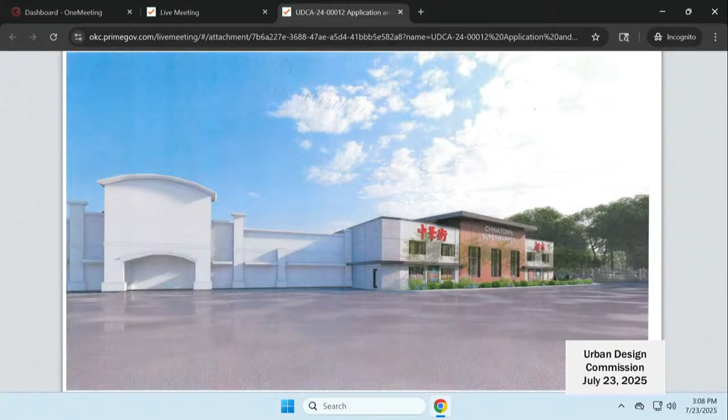Okay. Applicant? Hello, everyone. It's Holly Hunt, Sam Gresham Architects at 400 Northwest 23rd Street. I see some faces that were here last time we talked about this project and some that aren't, so I'm just going to give a quick recap.

The orientation of this building, while unique, is very much in keeping with many of the design guidelines in the urban design overlay district, including urban density and putting parking lots behind buildings as a way to create a very beautiful streetscape.

Since you saw this last, we have really tried to make this a more comfortable, inviting pedestrian space, including much landscaping. We've got benches. We've included some murals on the building, including some windows on that lower level.

We've also lowered the awning, something I discussed with staff regarding the rhythm of the fenestration. Lowering that canopy, as you can see, it aligns with the building next door, and it is a common break point for a lot of the fenestration along this street.

We've also lowered the window sills of the larger windows that you see facing Classen. This again just helps to create that connection with the street for pedestrians and passersby.

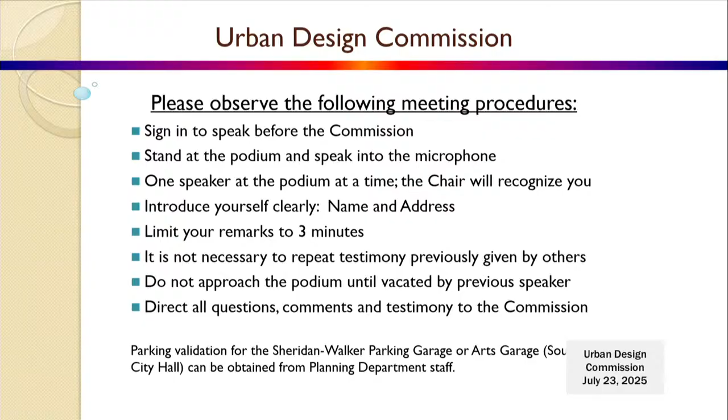Again, if it gets wet, it'll get a little darker and then it'll dry. That's what you're seeing here because I tried to wait for a dry day in June, but it was very hard because we had so much rain. So that little bit of variation does exist.

Again, if paint's the cure, I think our owners are more than amenable to that. I don't want to play architect on your project, but I'm concerned about the consistency and the look and feel of what you're going to get with just that raw concrete. There's an image showing an example of proposed tilt-up concrete modern design, and that looks pretty cool, but I've never seen that, not even in precast done in a shop. So I'm a little concerned about that raw concrete just sitting there.

As far as the staff's concerns about signage, I just need to get him more dimensions and drawings on these and run those calculations again for that quick turnaround. But I am happy with a condition to submit all of that to staff. Mike's probably sick of me by now, but I'd be happy to get all that to him.

I have a question. The concrete isn't really bothering me so much, but I am questioning a design aesthetic that does not provide a door from Classen, and that entry is baffling my mind. Help me understand that.

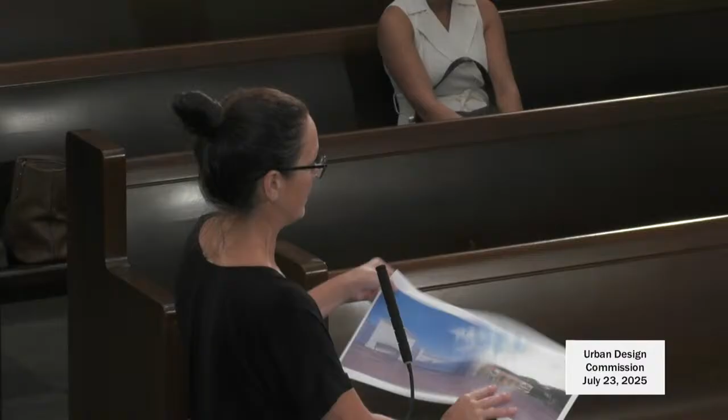And while we do have a door, there is an exit door - you can see it in this rendering. There's an exit door there, and there's also a door on the south side. So there are doors, but in this location it just doesn't really work for the interior layout, nor would it work for the users of the building.

Again, I have shown an option with a door on that side, and the owner really feels it's going to be an issue for him in the future running this business. So we're pushing for no door on that side, since it will never be used and likely will serve no function other than to create a dangerous security issue.

I do understand it from a utility and function standpoint, and I've been a business owner and developer myself, so I get both sides of that. From a design aesthetic, it's yuck. But I do understand you've got to run a business.

That's why I dressed up that side to look and feel like the front facade. It doesn't feel like the back of a building to me - at least that's not what the majority of grocery stores look like on the back. So we've done a great deal to try to avoid having a secondary or backside to this building, and that was our design solution to that.

And there's not currently a door on the west side, right? I think it's Golden Phoenix, maybe. Yes, there's no entrance to the grocery store on that west side currently.

And currently, in this rendering, you can see this is the entry for the Golden Phoenix restaurant here. There's a little bit of parking there - it's non-compliant parking that's existing that we're very gracious to have been able to keep. But that's the only, there may be 8 or 10 parking spaces on that side, and they're mostly used for to-go orders and things like that.

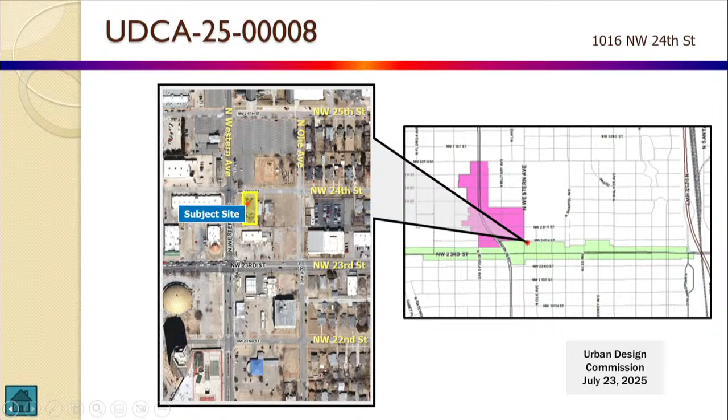Any questions for staff? Do we have an applicant available? We do. Mark Zitzow, Johnson and Associates. I think Michael pretty well covered it, but I'm happy to answer any questions.

I don't have any questions, but my comment I'll make, the house is beautiful. I'm just kidding. No, architectural gem. I support, I appreciate the pictures. I believe this is a substantial improvement, and I think it's fitting to what I believe people in the district probably would support.

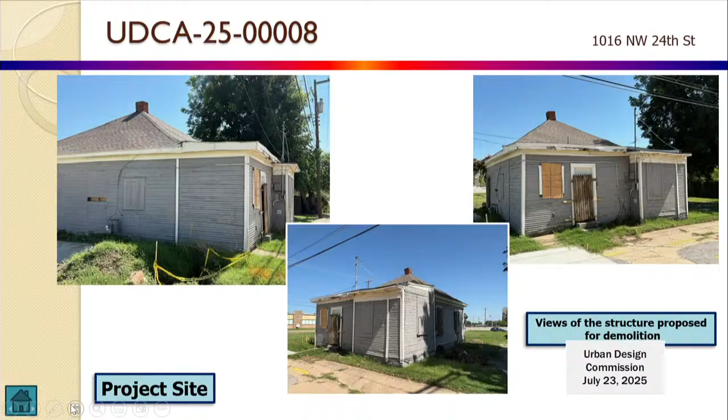I'd make a motion, but I don't think I'm allowed to. Are there any other questions? Because if not, I'll put a motion out there. Any other questions? I think we're ready for a motion.

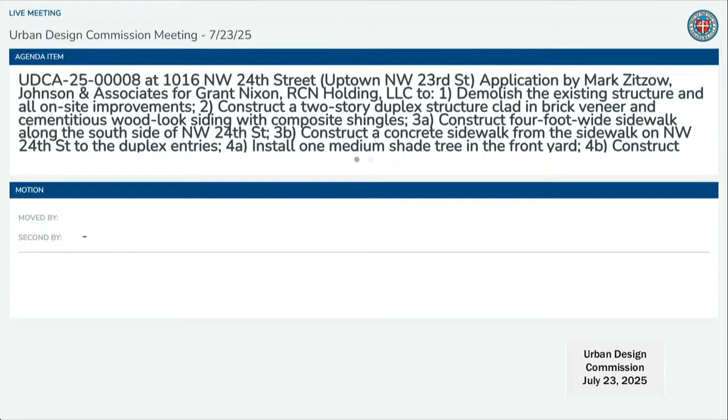Motion to approve the application on the basis that the project meets the regulations and guidelines of the Urban Design Overlay District zoning ordinance as referenced in section C and D of the staff report. Have a second? I'll second.

Right? It's passed? I meant to vote yes.

All right, moving to the next item, we have UDCA-25-00013 at 904 Northwest 23rd Street.

Again, this is one where we took a look at the existing structure on site, made some assessments with respect to the applicable criteria for demolition in the Urban Design Overlay District. Very much like the last application, there are a series of structural deficiencies with this particular structure.

The application or submittal packet includes a copy of the engineering report prepared for this. Part of it shows a lot of trash, debris, and rubble that can easily be removed, but there are also interior structural issues impacting the building, visible in some of the other photographs in the agenda packet.

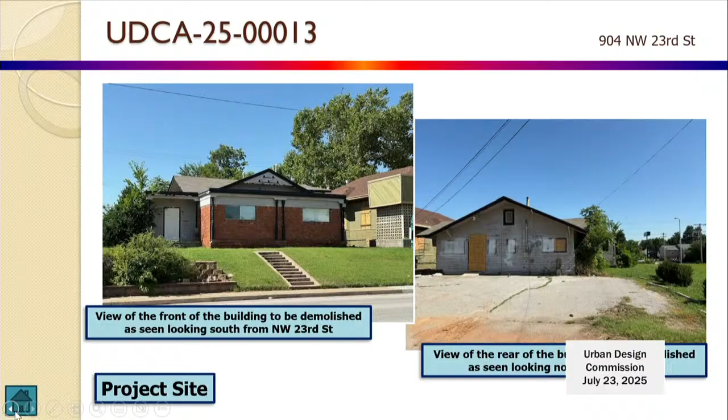Got it. Yeah, I was getting ahead there because I saw the images, and then the intent I know is demolition. So I bring that up - it's not a comment, maybe. As it goes down, you just know parking is always a thing that either neighbors or even commission has.

So is there any other questions for the applicant? Is there anyone in the audience that needs to come to the podium?

Okay. I'll make a motion to approve the application on the basis the project meets the regulations and guidelines of the Urban Design Overlay District zoning ordinance as referenced in section C and D of the staff report. I'll second.

All right, it's passed. Thank you. All right, next item here, we have...

UDCA-25-00014 at 908 Northwest 23rd Street.

This application is part and parcel of the one you just heard. It's right next door to the last project at 908 Northwest 23rd Street on the south side of 23rd, just west of Francis. It's basically the same, essentially the same review process, essentially the same type of structure we're dealing with. It was originally built as a single-family structure in 1918. It's been substantially modified at the front of the building.

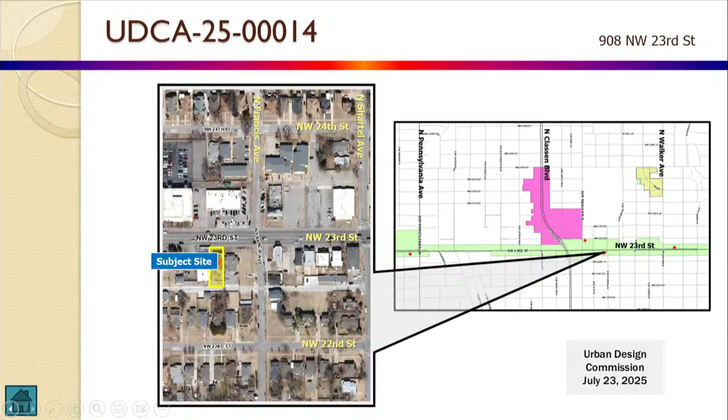When it was converted to commercial use, probably sometime in the 50s or 60s. The engineering report you saw on the last project is the same as for this one, and the pictures in that report document some of the structural deficiencies impacting that particular structure. Again, because of the modifications made to the structure, we feel it's not a significant architectural or historical resource, and therefore we've recommended approval of the demolition of this structure to the commission, and we're prepared to respond to any questions.

Okay. Mark, I assume you're the applicant? Yes. Mark Zitzow, Johnson Associates, 20 Sheridan Avenue. Nothing to add, just happy to answer any questions.

Okay, I assume there's no one else in the crowd. Do we have any questions for staff or the applicant? No, but I have a comment that I think that breeze block is really pretty, and maybe when we're demoing some of these projects, if you want to someday swing by, I'm sure we can put it to good use somewhere. Make a great patio. We actually used that and had to source it for the class. Yeah.

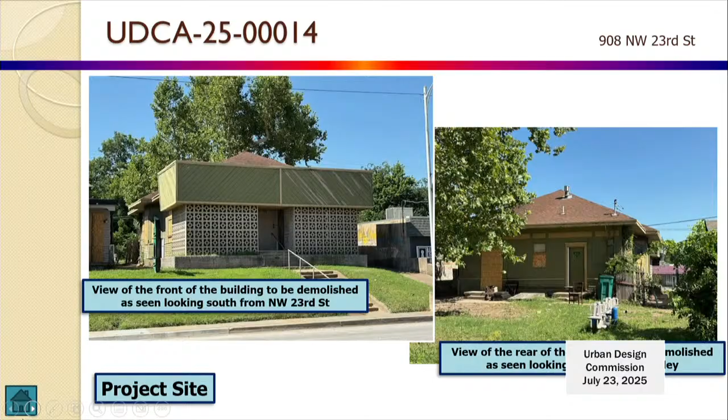All right, do we have a motion? I'd like to make a motion to approve the application on the basis that the project meets the regulations and guidelines of the Urban Design Overlay District zoning ordinance, as referenced in section C and D of the staff report. Okay. All right, it has been approved.

On to the next item, UDCA-25-00015 at 417 Northwest 23rd Street.

Thank you, Mr. Chairman. This application is for a commercial renovation of an existing structure on the north side of Northwest 23rd Street at 417 Northwest 23rd, located between North Hudson and North Walker. It's just two doors down from the Tower Theater to get your bearings on where this project is. This building is owned by the OKC Community Church, which also happens to own the building and the property next door to this on the west between this site and the Tower Theater.

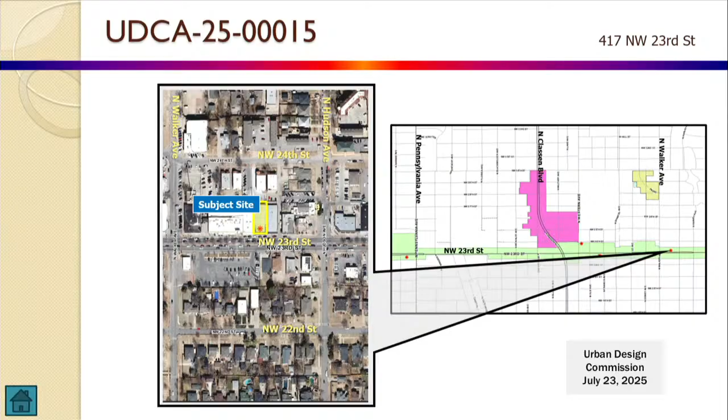They're proposing to expand their church operations and functions into this building next door, and as part of that, they've proposed to renovate the front facade facing Northwest 23rd Street, most notably the removal of this massive wooden canopy that was probably built in the 50s, based on our research. Additionally, there's a glass storefront on this building with two angled entry doors, one at each end of the facade, and those entry doors abut some stone veneer facades on both ends. Initially, when we got this application, staff was pretty concerned about that modification, because that was kind of a historic theme of the day in building commercial buildings at that time.

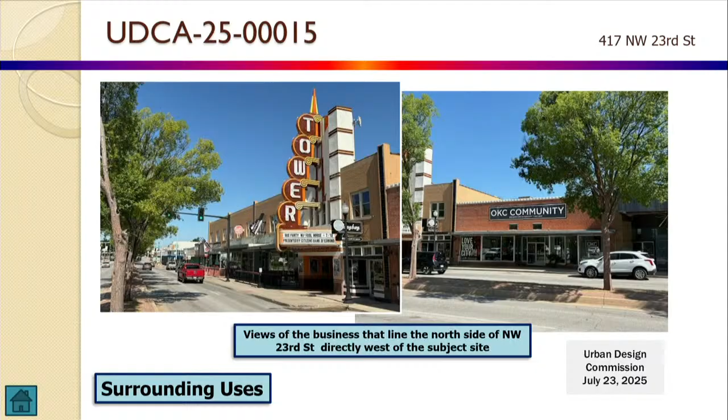However, after reviewing it against the design guidelines and the other applicable provisions of the Building Conservation and Rehabilitation Guidelines, we came to the conclusion that because they are proposing to make this building look a lot more like the building it sits next to—I don't have those images, can you show those, Katie—we feel that it's appropriate to allow this renovation to proceed as it's been designed and presented to you, and therefore we are prepared to recommend approval of this application, and we are available for any questions the commission may have.

I have a question. Why do you want to get rid of that unique canopy structure? Hi there, my name is Collin Fleck, I'm with Bockus Payne Architects. Why do we want to get rid of it? Maybe a little bit subjective.

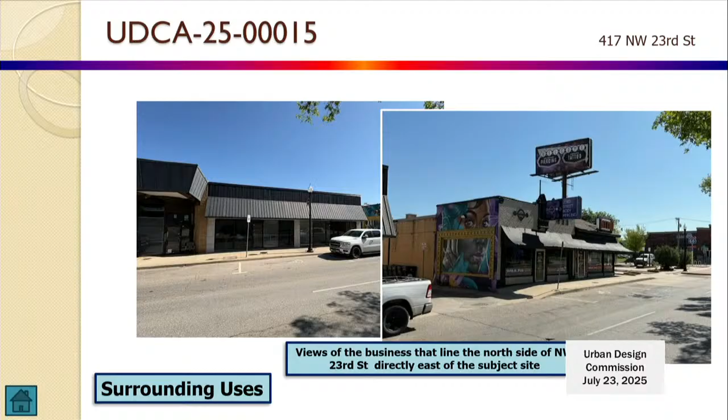There was a desire by the church to relate more to their existing structure, making it more visible for their entire operation there. So when we began discussing what they were looking for, we immediately started thinking about how to fit the context of what's there, and whether it was possible to reuse that. We pretty quickly determined it was not desirable to keep it and didn't align with their vision for this property. From a scale perspective, they're looking to transform the storefront section into more of a coffee shop.

They wanted to bring the scale down, bring canopies that are a little bit lower. Eventually they'd like to have some streetscape furniture, encourage pedestrian access, and be a little more inviting. It felt counter to what's there. That's a subjective thing, but that's the thinking behind it.

My opinion is that it's actually a unique feature of 23rd Street. When you get into developing long swaths of shopping centers, of which I have done, and start to make it all look so similar, which I have done, it does take away. For me, when I drive down 23rd Street, that canopy always pulls my eye right to it. Maybe it needs reconstruction, maybe it can't exist, but it's just my opinion that it's a beautiful aspect of that street.

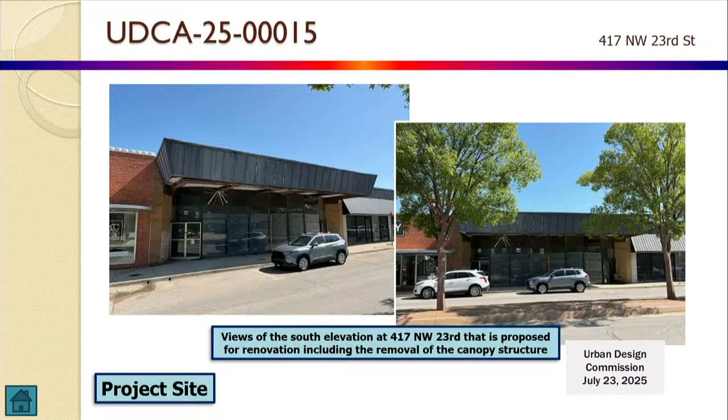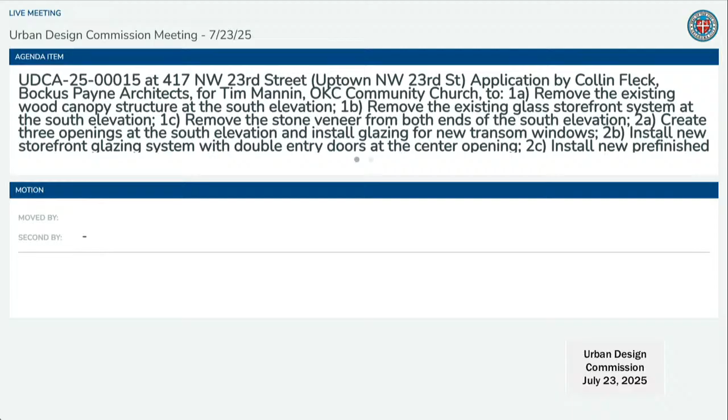Yeah, I don't have any other comments. If there's no other questions, we'll want to make a motion. I'll put forward a motion to approve the application on the basis that the project meets the regulations and guidelines of the Urban Design Overlay District zoning ordinance, as referenced in sections C and D of the staff report. I'll second. All right, it's been approved. Thank you.

Okay, next item, we have SPUD-1737 at 2944 Southwest 8th Street. Good afternoon, Laura Griggs, Planning Department.

None of you have seen this before. The last time this property was rezoned, we still had the Riverfront Design Committee in place, and so it went before them. At that time, it was rezoned to a glamping facility, which was the first time I'd ever heard that terminology. Unfortunately, that project never was realized.

So we have a new SPUD that has been submitted, and it is before you to make a recommendation to the Planning Commission, actually at their meeting tomorrow afternoon. So this originally was on your agenda for June, and normally we don't cut it that close, but we

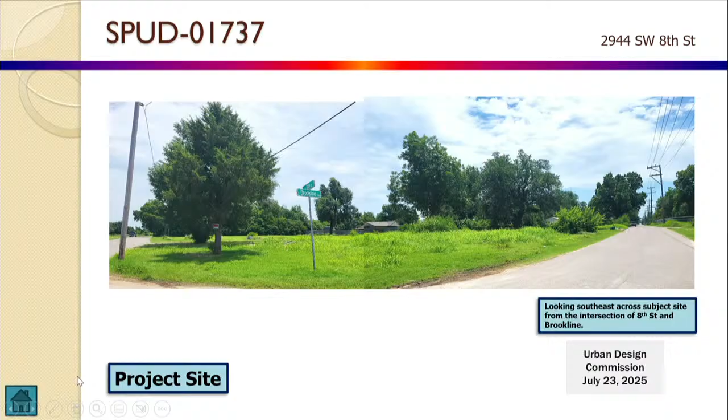unfortunately had to delay it because we didn't have quorum. So this particular area, if you're not familiar with it, this property is vacant right now. It definitely needed mowing while I was out there. It is directly across the street from the trail, directly across the street from the river, and there is an access on the corner across the street.

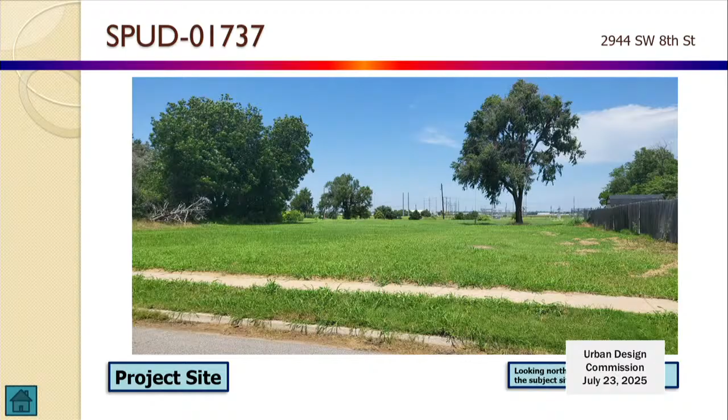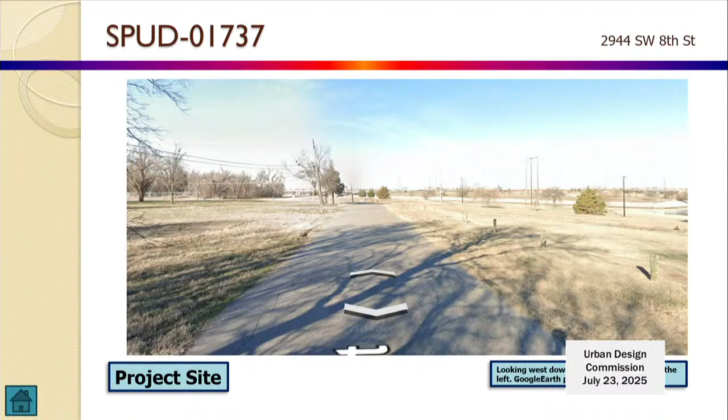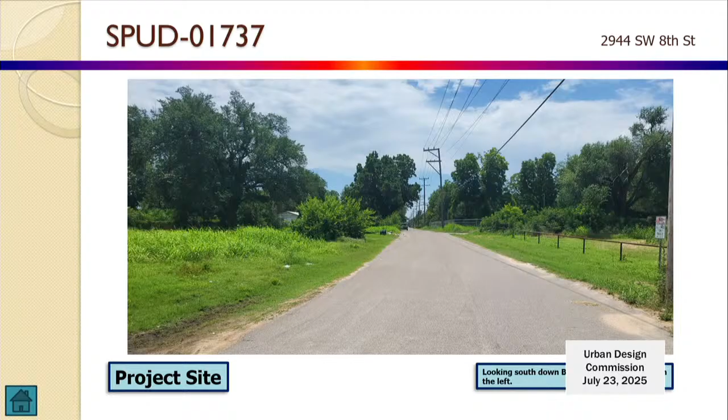So anything that goes here has really easy access to get to the trail and go east and west. It is adjacent to, so we have, this is where you can see all the trail and stuff. It is in a residential neighborhood. Obviously, we don't have curb and gutters, we don't have sidewalks out there, so it is more rural feel when you get out there. And as you're looking at all these pictures, you're not actually seeing any other houses, but we do have some in the area.

Immediately across the street to the south, we have residential, and then this surrounds a residential property. If I'm not mistaken, it was on council recently for being declared dilapidated. And there is another residential structure that's on the east side of it.

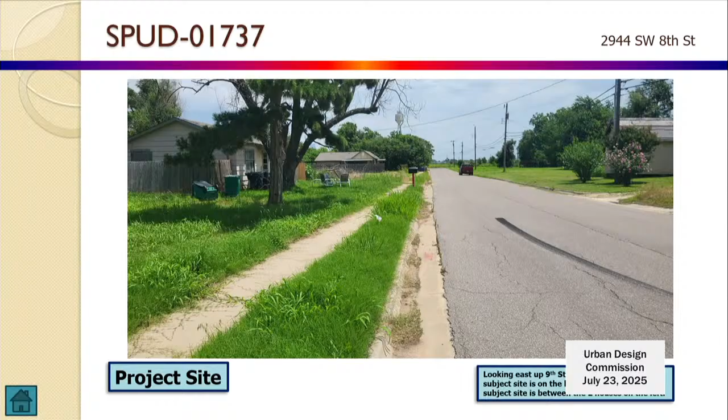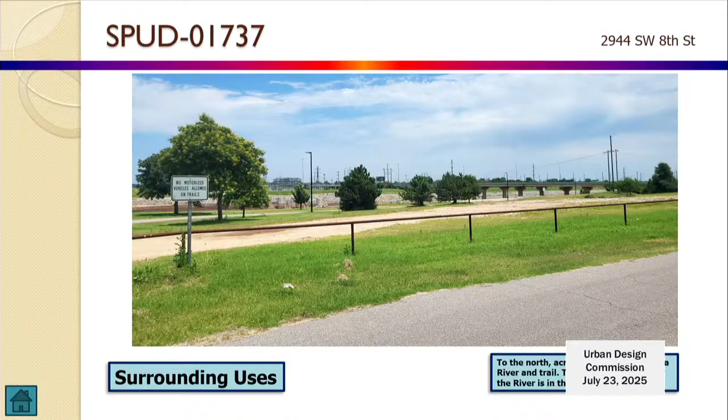So we have an area that could definitely benefit from the improvements that would be made because we will require sidewalks, and we will end up with some density on this site. And obviously the city was working on something too, but this is the gate that's in the corner. So there's easy access for people because there's an opening. You can get there on your bike or you can walk through it to get to the trail.

So this is the house that's being declared dilapidated, and this is one that was recently renovated that's adjacent on the east that is occupied because there were cars in the driveway, and then this is the one across the street to the south. So we'll just kind of land on this one right here.

So this particular piece of property is now being proposed for a SPUD that actually has some more uses proposed. Staff really didn't have any issue with any of the uses proposed at all. Some of the uses in River are shown to be conditional uses, but when we established the riverfront, the Scenic River Overlay Design District back in 2007, we didn't create our own conditions. So I honestly don't know why we set it up that way. From that perspective, I did not really have an issue with supporting those uses, especially the uses that they are, because they're low-impact uses. They're neighborhood-oriented uses like libraries and community centers.

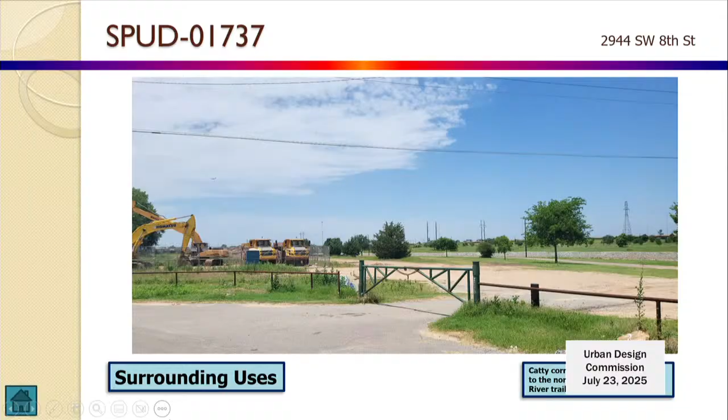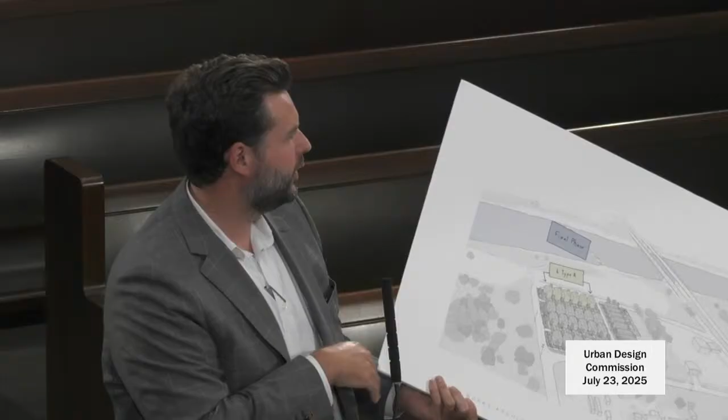Good afternoon, Mark Zitzow, Johnson & Associates, 1 East Sheridan Avenue. Laura did a pretty great job summing it up, and I'll start by saying we have no objections to any of the conditions Laura stated. We're in agreement, and we'll make those revisions after Planning Commission comes up with whatever revisions they may have at tomorrow's hearing.

So the intent is really to build a pocket community inside of this neighborhood. If you look at the aerial that was on the screen, there are two existing homes across the street. It's almost like a storage facility - there's a shipping container out there and other accessory buildings that are just up on skids in the front yard.

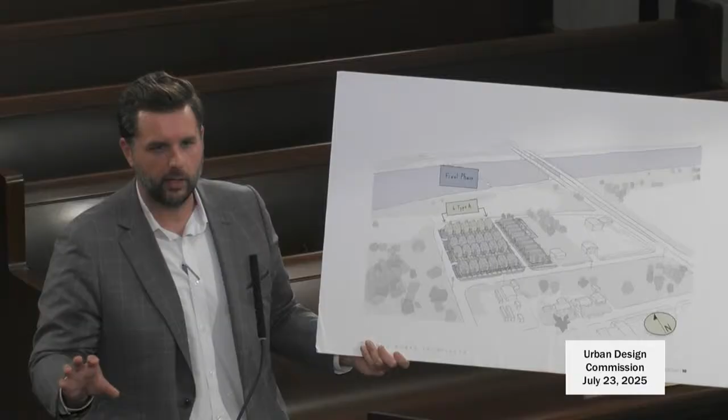So we think on this part of the river, this could be a desirable product. The goal here is to offer a housing option for folks coming to the fairgrounds and the stockyards, when they come in with crews and farm hands and other people who aren't looking to stay in hotels, who need a kitchen because they're staying for a longer period of time. So that's a portion of what this is.

The goal, though, is to set this up so it could be sold as individual homes. And so all of that is being taken care of on the engineering side, and we'll get through that when we get to platting. Laura brought up the commercial piece.

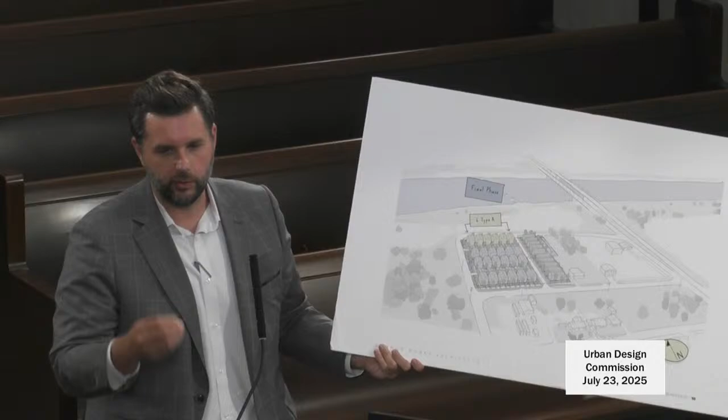We have asked for commercial uses. We were very restrictive on where that commercial could go and the square footage, so it's limited to these beige units on the north. The trails on the river are right there, so the hope is that as time goes by, some of these units could be live-work, maybe a bicycle shop or even a very small convenience store, so folks here can get bread, candy, what have you, but also get some visibility from the river and the folks using the trails.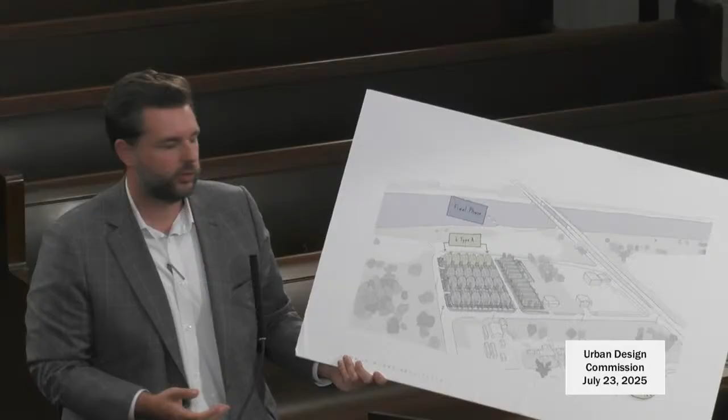So with that, I'm happy to answer any questions. We're excited about the project. We think this is a much better use for the property than the Airstream glamping use, given that it is in a neighborhood, even though the northern portion is quite vacant.

I'm glad to see development happening there, neighborhoods. When you say neighborhoods, I kind of crack my knuckles and start thinking more about what we could do as a city. I love that we have the mixed use on the outskirts of the micro neighborhood - I think that's in line with how we want to see density grow in our city. I'm interested to know if your client may have any future ideas to develop in and around this space also.

Because when you build neighborhoods at the core of existing neighborhoods, those around it tend to naturally transition out of the neighborhood life cycle. They're transitioning out. And of course that's speculative, but as we continue to see the city grow, I think that's something we're all interested in - seeing these types of developments continue.

The one thing I would say, and it doesn't show up on this map because of how we show the river area, is that the zoning in this neighborhood ranges from R1 to I2, and you don't normally see that within a neighborhood. There's been a lot of industrial zoning to the south and east, so this is a hodgepodge - there are owner-occupied houses, rental houses, and vacant lots. I think this is a neighborhood that this could potentially really help, maybe spur something on, starting at the north and working its way south, maybe stop that trend to go industrial within the neighborhood.

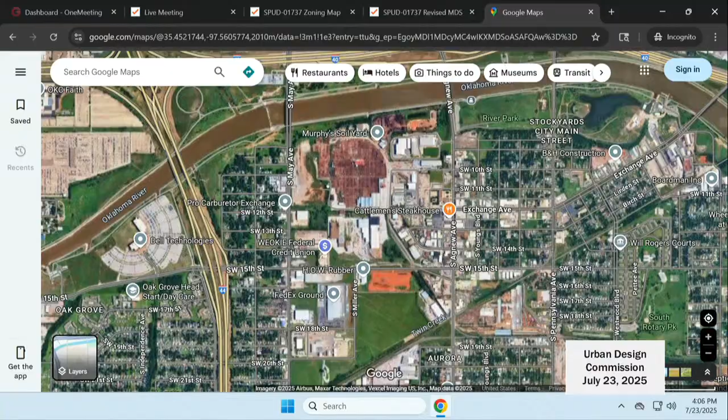So I love this. The code, or the zoning for lodging accommodations and commercial lodging, my guess is that would allow you to turn this into kind of a hotel area, which you could rent out, which I think is great.

One issue is this could actually help the area have a higher and better use, but in 5 years, as it develops, this is permanent zoning. You can't get away from that, and that could hurt it, because if you have a hotel area but single-family homes set up there, people may not want to move there since you can never get rid of the zoning. So I'd be curious if you'd put a condition for a 5-year revisit for the Urban Design Commission to review the spot.

One thing that's important on the uses: this isn't going to be zoned as a hotel. It's zoned in the R2 category. It'll be single family with special exemptions for home sharing, through Board of Adjustment, which have a clock on how long they can be a home sharing unit. The neighborhood and surrounding owners get noticed every time it's up for reapproval. If there are issues, complaints, parties, the Board of Adjustment can amend the conditions or deny the home sharing permit. So this isn't a hotel from a land use standpoint.

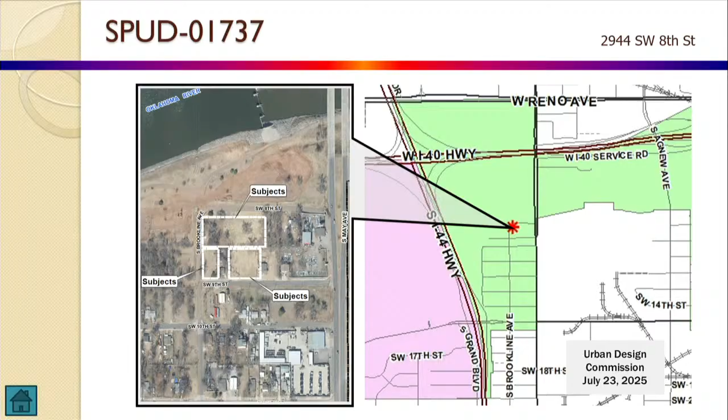There's inherent risk when you go into a neighborhood and you're the first one doing something. And so it's important to have the backup strategy to pivot and do something else if they can't gain traction. This allows them to essentially have built for sale single-family homes that are 2 bedrooms and hopefully somewhat more affordable than you're seeing in other neighborhoods.

I was just going to add that this is different from a CA. We don't have to fix everything right now. You all are making a recommendation to Planning Commission. You can include that comment about the concern regarding the lodging accommodation, commercial lodging, as part of that recommendation, and then the applicant can continue to work toward resolving that with staff, with the city attorney's office. What y'all just shared there, I don't know how the city would perceive it exactly, but it sounds like it wouldn't specifically work for these individual homes, so I'm not concerned with it if y'all say that. So I don't have any other questions or comments.

Sorry. Do we have a motion? I don't know if there's anybody else here that wanted to speak. I don't know the people in the back row, okay, so you might ask. Is there anyone in the audience that wants to speak on this? Thank you.

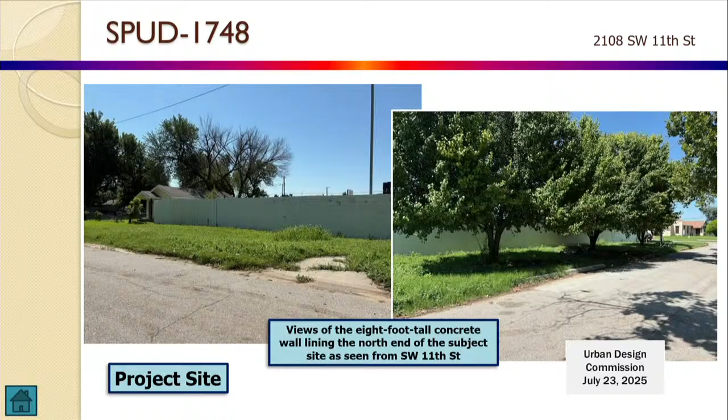I've actually never done this, and I just wanted to speak to this—this is actually the first time that I have supported taking something out of River and putting it in another design district. Part of that is because back in 2009, there was a SPUD that came in on the lot that was in River. We recommended denial of that, and it got approved. So with the approval of that, to me, the council set the tone for what we think is appropriate on that piece of property. With that action, it didn't make sense to keep it in River because that was not a use that River approved.

And the fact that this block is so broken up in both of our districts, that doesn't make sense either. It needs to be consistent. So across the street is all in River.

From that perspective, I provided some information under previous actions, but as I said, you've never seen one of these before. I also provided information about how far away from the river this is. You can't see it from the river, you can't see the river from here. So is it appropriate to leave it in River? I didn't feel that it was, which is why I'm recommending one of your conditions be to take it out of River and put it in SYT. So I don't know if you have any questions about that perspective, since you've never heard it from us before.

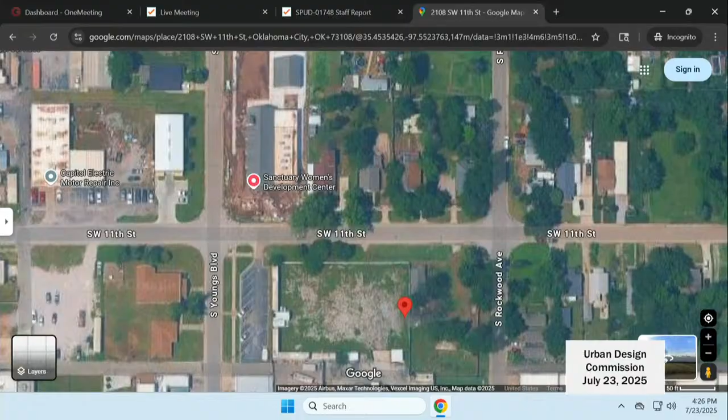And the neighborhood's just primarily residential use, correct? Well, kind of, yes and no. That area is a bit of a hodgepodge with houses that are abandoned. To the west, you have other industrial uses. So it's an area in transition, perhaps.

Well, it's almost like another SPUD was approved that kind of creeps in because of allowing access on 11th. Because once you create access on 11th, you might as well industrialize the entire neighborhood. This decision could set that precedent, because those other things are probably outside of our jurisdiction.

I'll comment that there used to be a church on that northeast corner, Catholic Charities, and they tore it down. They built a new structure, their women's development center, Sanctuary, and they had a parking lot on 11th, but that's gone now, and all their parking is from the north. But the rest of that block is single-family residential.

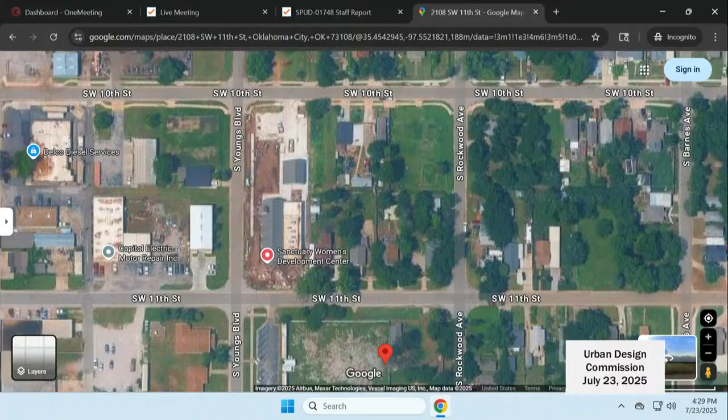I think one other issue potentially is—excuse me, I think they're separate parcels, I don't think it's one tract. So I don't know that zoning legally can landlock a parcel if that north tract flipped. They are entitled to access when they front a public street.

I personally prefer that there is access on 11th from a neighborhood perspective. For me, it feels a little bit more like you live there, but you also know you're in an urban neighborhood, and to me that makes more sense. I feel a little more ominous about a giant wall with trees, not knowing what's going on over there from a living perspective.

Yeah, but also once you get access back there, it creates even more accessibility to park on the street and bring cars out, because it's very common for mechanic shops to begin to use the neighborhood that way. And I get that the zoning may be changing, I just think it's still a neighborhood. So for me, I wouldn't want it to be that way in my neighborhood if I could avoid it, and that's my only comment. But I do understand the need.

There isn't any opposition outside of maybe me. There's no one else in the room. Right. And notice goes out, and we've received no formal protest for tomorrow's hearing.

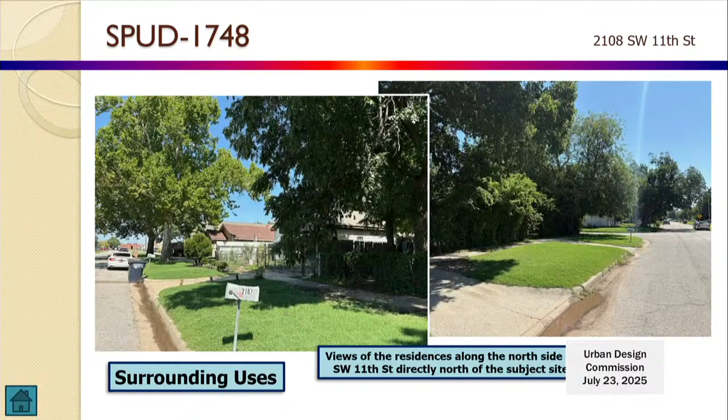They're going to want to park closer to the business they're walking into. I don't know that it's really accurate to say these parcels on the north side of the alley have no access. The properties on the north and south side are under the same ownership, and the alley's been closed. The way we viewed this when we analyzed it, we assumed this new building on the north side was going to be an expansion of the business facing Exchange. It's already a collision place, so we just assumed it was an expansion of that use.

If it's going to be a separate operator not part of this operation, then I guess we can understand the need for access and exposure on Southwest 11th Street. But I don't think you can access the parcels on the north side of the alley through this property on Exchange under current conditions. If they were to sell off these lots on the north side to someone else in the future, then you'd have an issue because they would not have access. But right now they do.

What I'm saying is, if you look at the county assessor map, they are independent legal lots. It's not one tax parcel. I understand. And so I don't know that a SPUD can landlock independent lots. Well, they've given up the access for 30 years, so.

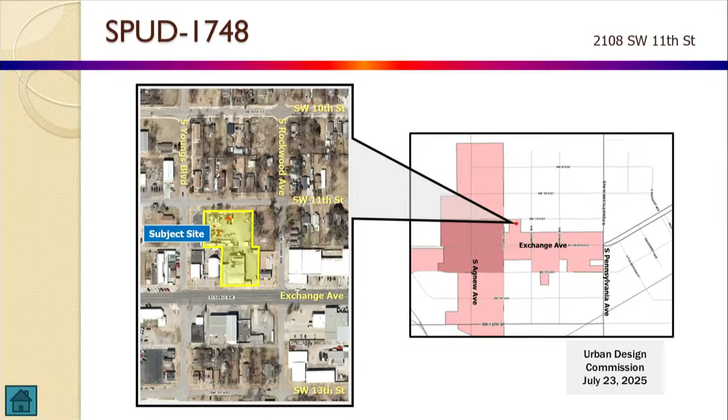As a reminder, what are the ones that... you basically said of those four items, you needed B. B. Yeah, A, C, and D, we agree to the conditions as written.

So, if someone wants to make a motion to exclude or include B, whatever you feel best, or if we need more discussion, we can discuss as well.

I think the idea being requested is that B be modified to say that access would be from Exchange Avenue as well as one access point from 11th Street with a gate entry, as I understand it. Which I'm okay with.

Let's just do it again. I'd like to make a motion to provide a recommendation of approval to the Planning Commission on the basis that the project complies with the intent of the Scenic River Overlay Design District zoning ordinance, as referenced in Section D of the staff report, with the condition that the SPUD be revised as follows: A, land uses section I-1 shall be revised to eliminate 8300.21 automotive and equipment storage from the list of allowed uses.